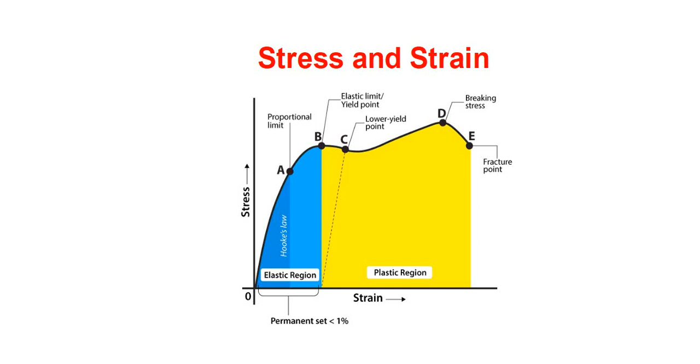Hello friends, here in this video lecture, we will understand the basic concept of stress and strain. So let's start with the stress.

What is stress? It is defined as the intensity or magnitude of an internal resisting force developed at a point in the member under an external load. So here are three very important keywords which we have to understand for stress. The first one is the internal resisting force. The second one is developed at a point, and the third one is under an external load.

So, for a better understanding, we have to take an example of a circular rod which is under an external load. Stress cannot be generated without any external load. So, stress is generated inside the material. How can we understand this? We have to assume a plane which is under stress and which is in the cross section.

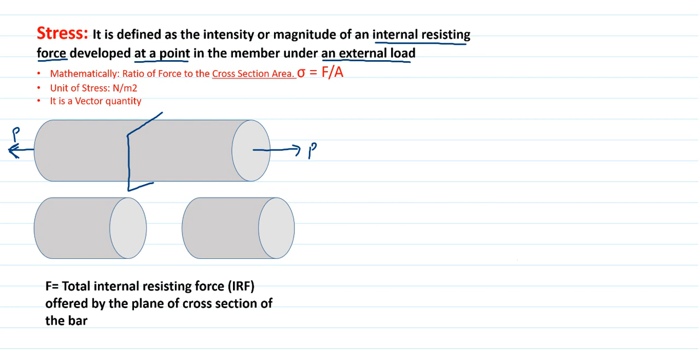Okay, so this plane has divided this circular rod in two parts, the first one and second one. Now if we assume these parts individually, the force is applied on the first part and second part individually. So how will this stress provide the resisting force inside the material to withstand a particular external force, that is P? That force is known as internal resisting force, that is capital F.

Here also the internal resisting force will be applied in the leftward direction, that is capital F, and this F is known as the total internal resisting force offered by the plane of cross section of the bar, or we can say of the material.

Okay, so to develop an equation for the stress, we have to assume a small area on the cross section. There are infinite small areas which are providing the resistance to the deformation. That small area will provide a small resisting force, that is delta F, and the area of this small strip is delta A. From the formula of stress, sigma equals F by A, force upon area, the stress generated at the strip will be sigma equals delta F upon delta A.

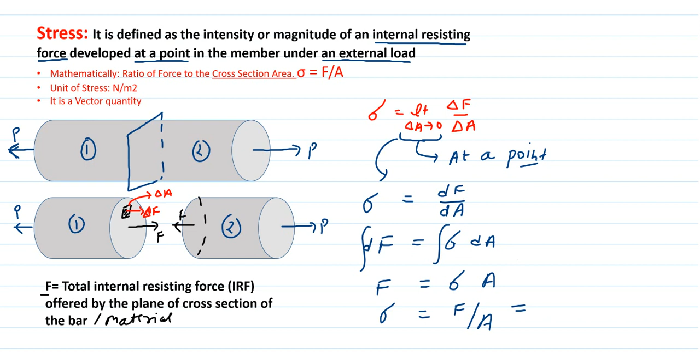Okay, so now by using this equation, we can write dF equals sigma into dA, and if we integrate both sides, we have the equation F equals sigma into A. Now we can write sigma equals force upon area, and this can be replaced by P upon A, meaning force applied divided by area.

How? From the second part, we can see that the leftward force equals the rightward force, because the individual part is also in equilibrium. So F equals P we can write. So P upon area is the stress. Stress is defined as the external force upon the area on which the external force is applied. Okay, so this is all about the stress, and we can see there is a term known as load.

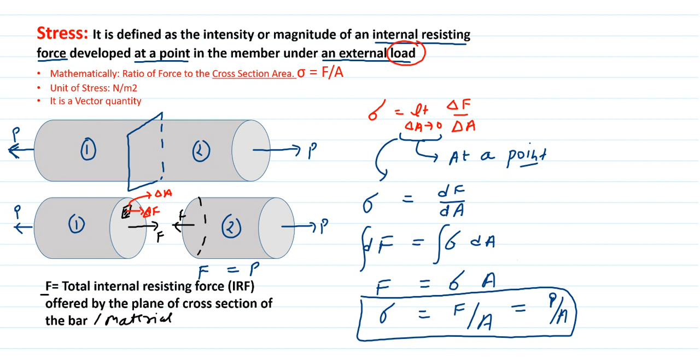Sometimes students are confused that load is only the force. No, load can be anything. It can be force, it can be moment, it can be torque. So let us understand what types of loads there are and what kind of stresses will be generated for different loads. If we have a force, it can be pulling or pushing. In this case, the stress generated will be the normal stress, because the force is applied perpendicular to the cross section.

So sigma will be written. Sigma is the notation of the normal stress, and if it is tensile, we can write sigma T here. We can write sigma C for compressive. Here the bending stress will be generated, and the bending stress is also a category of normal stress. So it is denoted by sigma also, and as a bending stress it can be written as sigma B.

If we apply a torque on a circular bar to twist the cross section, we can see the initial cross section will be like this. After twisting, it will be like this. The cross section is rotating in this direction. The stress generated on the surface will be denoted by tau, and because of torque, it is known as the torsional shear stress, denoted by tau T. So different stresses are generated depending upon the different types of loads.

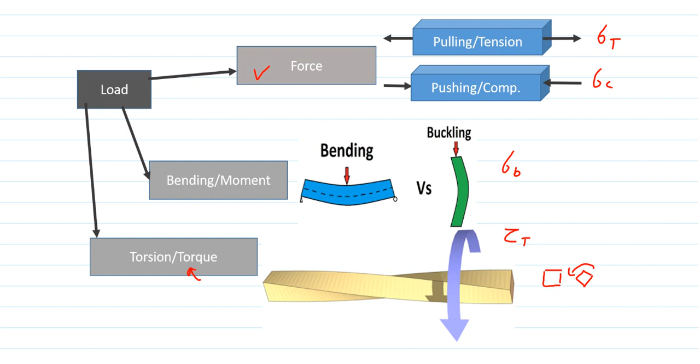Okay, now we are going to understand what strain is. Strain is nothing but the ratio of change in dimension to the original dimension, and it is generated because of external load only. Mathematically, it is written as change in dimension divided by original dimension.

Since it is the ratio of dimensions, it is a unitless quantity. It is a vector quantity. How? If we take an example of a circular bar under tensile loading, we can see that its length will increase and its diameter will decrease. So the change in length in this direction will be positive, but the strain in this dimension will be negative. This is the change in diameter; it will be negative. So in this direction the strain is positive, but in this direction the strain is negative.

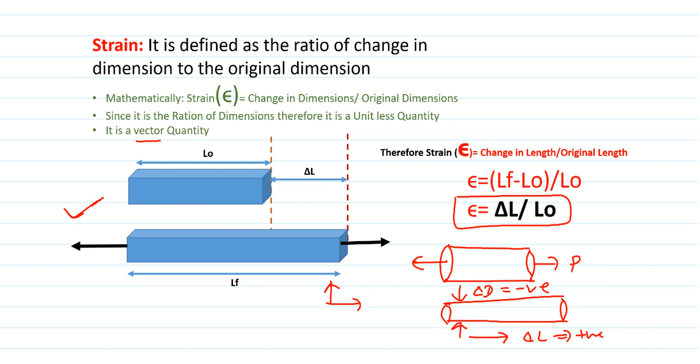So we have to consider the direction of the strain and also its magnitude. So it is a vector quantity. It is denoted by epsilon, and it is change in length divided by original length for this condition. Now we are going to make a relation between stress and strain using Hooke's law. It states that when a material is under a load, the stress generated inside the material is directly proportional to the strain generated. Remember this point.

Whenever we apply an external load on any material, that material will experience some strain and also some stress. Stress will be generated inside the material, which we cannot feel. The strain can be seen by measuring the dimensions before and after loading. So according to Hooke's law, stress is directly proportional to strain. If we replace this proportionality, we need a proportionality constant. This constant is named after Young, so it is called Young's modulus, and it is also the modulus of elasticity.

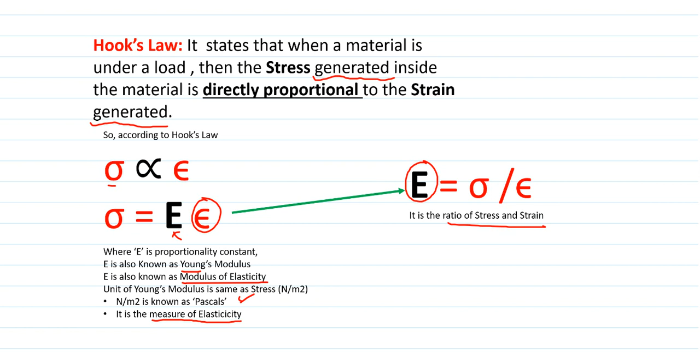The unit of Young's modulus will be the same as stress because strain is unitless: newton per meter square, also known as pascal. Young's modulus is the measure of elasticity. This is very important, measure of elasticity. If we reshuffle this, Young's modulus or elasticity modulus is the ratio of stress and strain.

Now we are going to see the formula for the change in length or change in dimension. If we apply a force on a rectangular bar, its original length is LO and final length is LF, and the change in length is delta L, by applying this force P, or F. So we have the formula for sigma, the formula for epsilon, and the relation between stress and strain, that is E equals sigma upon epsilon. We simply put the values of stress and strain in Hooke's law, so we get the change in length delta L equals F LO upon AE. This is the formula for change in length.

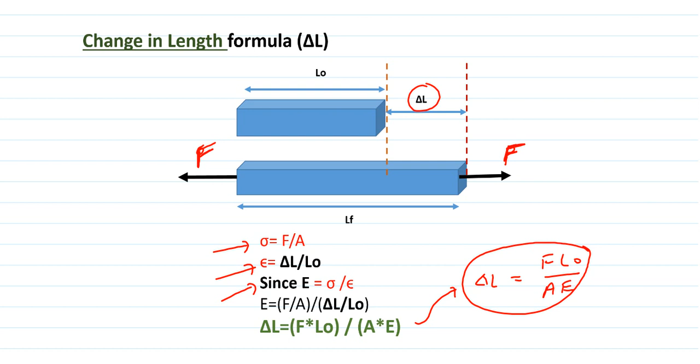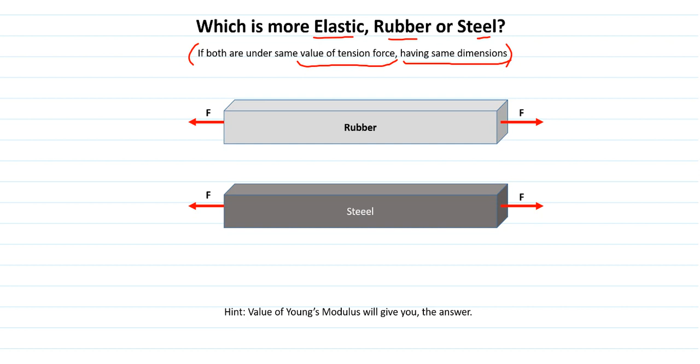Now I have given the hint that the value of Young's modulus will give you the answer. How to find the Young's modulus value? We have the formula E equals sigma upon epsilon. Sigma is force upon area, and epsilon is delta L upon original length. By simplifying, we have F LO upon A into delta L. So this is the formula for Young's modulus.

First of all, we have to understand which quantities are the same for both materials. The force applied on both materials will be the same, the original length will be the same, and the cross-section area will be the same because the dimensions are the same. Only the change in length will be different. Why? Different materials have different deformation under the same load and same dimensions. So if the change in length increases, Young's modulus will be lesser. If the change in length is lesser, Young's modulus will be more.

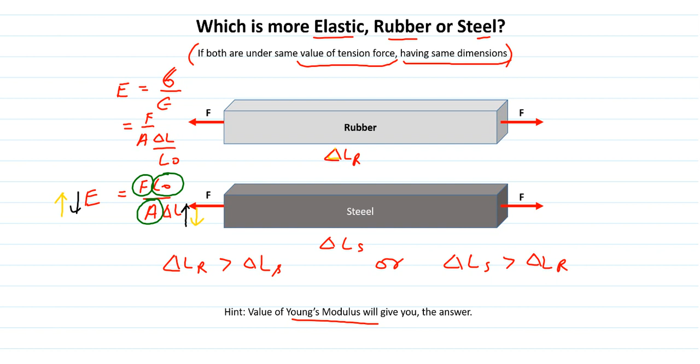So which will have the lesser deformation? If delta LR is the change in length of rubber and delta LS is the change in steel, which is correct: delta LR greater than delta LS, or delta LS greater than delta LR? Under the same loading condition, delta LR will be more than delta LS, so the second is wrong. From this, we conclude that Young's modulus of rubber is lesser than Young's modulus of steel. So steel is more elastic than rubber.

I hope all of you have understood the basic concept of stress and strain. In the next lecture, we will see the curve between stress and strain.